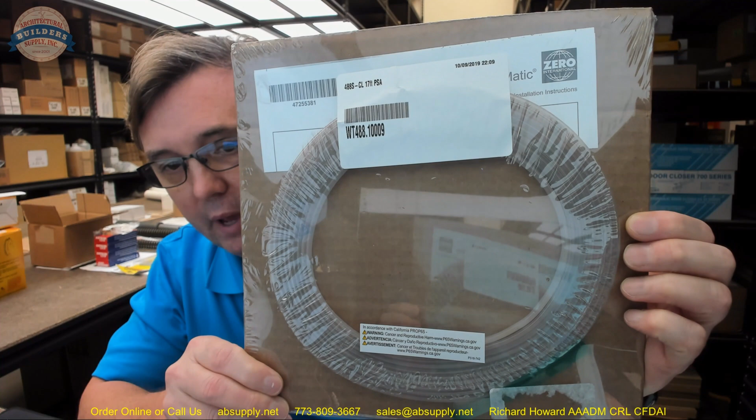Hello, my name is Rich Howard, owner of Architectural Builder Supply, and this video is to bring you a closer look at the Zero number 488S-CL. This material is adhesive gasketing.

I'm just looking to see where the end of it is. I'd like to pull some of it out of the card and take a look at it. Oh yeah, we found it. Sure. Okay. We'll just peek it out a little bit. I don't want to unravel the entire run of the material.

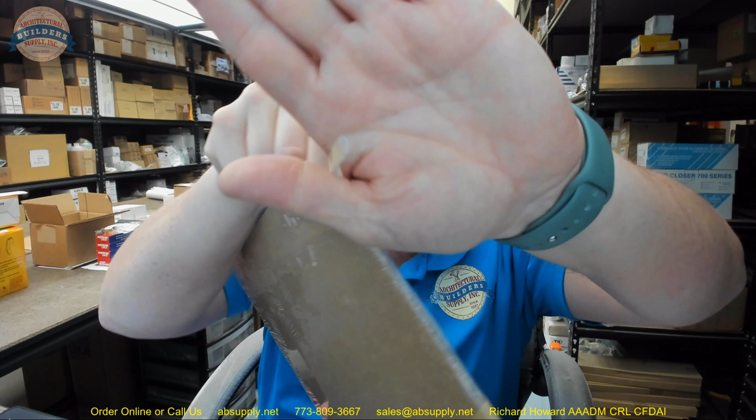This 488 is a very petite version of the typical teardrop style gasketing. The 488 material is really nice to use when you have a, and it's so small we're not going to see much of it, I suppose, on the camera, a very petite area in which you're working. You don't have a lot of room in terms of what it can be compressed down to. You might have a tight gap to begin with, and that's why you might consider the 488.

That's a peel-away paper backer covering the 3M adhesive on the back, and I specifically say 3M because it is absolutely the consensus of the hardware industry where adhesives are concerned. Coincidentally, along with my actual experience using 3M adhesives, it is the highest caliber available, period. No company manufactures an adhesive product that does a better job than 3M.

That's just my experience, and the fact that these high-end manufacturers use 3M, Zero and others, and not everybody does. I would personally not consider buying an adhesive product if it wasn't 3M based. There's 3M, and then there's everyone else. Anyway, moving on. So the 488 is a really small version of this. I guess we're not done talking about how great 3M is. I can do that all day. It's not going to come off.

Okay, I'm going to take a small sample of this. This client has a 3068 door size, and they've sent a 17-foot roll, so I know that we have an adequate quantity for me to nip off 3 inches of it, because I do want to show you the dimensional properties of the 488S. So the S means silicone. Silicone is really great because silicone is superior.

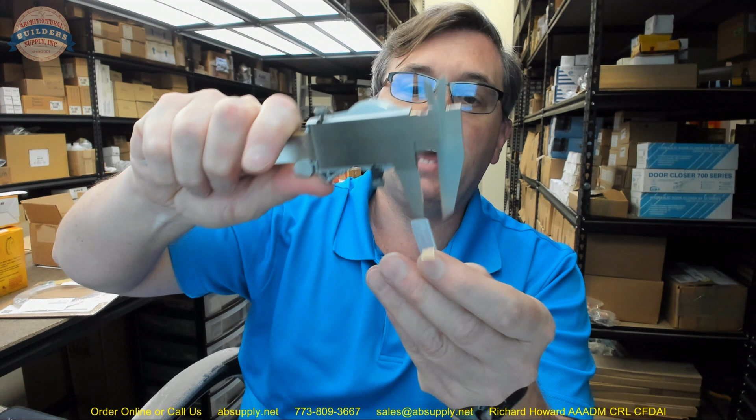0.355. Obviously it's silicone, so I'm not getting completely accurate. 0.375, and then the thickness is 187, which is 3/16. And my caliper tells me, yeah, that would be accurate. 187, sure. So it's 3/16 rather than the standard 1/4 inch.

So this will permit you to compress that down in an environment where, if you have a wood door, let's just skip fire-rated. This wouldn't apply for that. But if you have a wood door and your margin is less than 1/8 of an inch, you're not going to try to stick that traditional 1/4 inch thick material. You'll need to go with something smaller. And that's where this comes into play.

Now, you also might have an application where you don't have a lot of room, and you can't go with a 1/2 inch or bigger. And 3/8 is perfect for your example, and that's what this would be. Real great option for that. Okay, let's switch to the screen view where we can look at the mounting drawing along with the product brochure. Let's do that next.

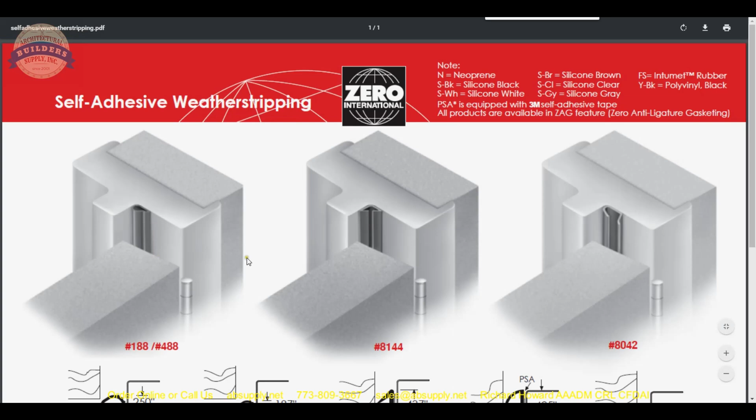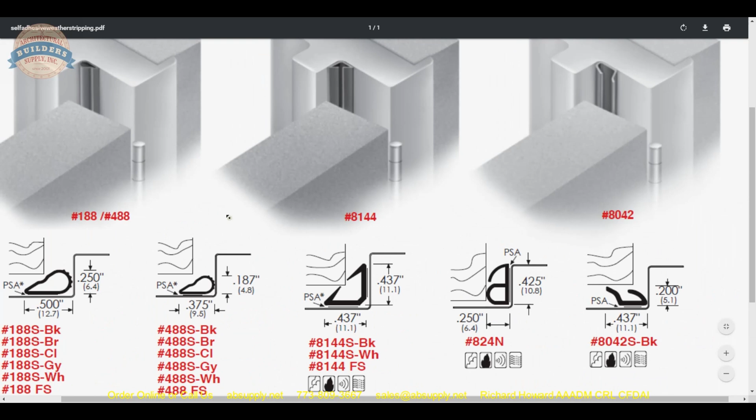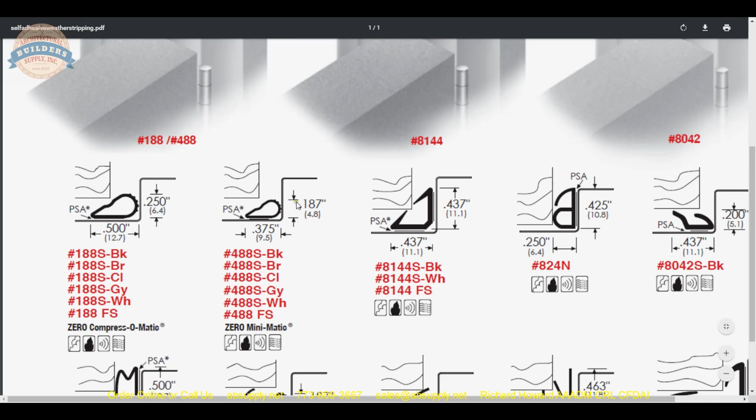One image alone for the 188 and the 488. They install the same way, the difference being the size. The 188 is your common 1/4 by 1/2 versus 3/16 by 3/8. The letters here tell us the color, which are defined up in the upper right-hand corner. Okay, CL is clear silicone.

Other common items that we can see from Zero, I can tell you that they're all reasonably common, but we do sell more of the 8150, the 117, this double bat wing occasionally, not very often. Certainly have sold the 824. I mean, we've sold all of the material, but those were the most common ones. Okay. Obviously, if you're looking for the most petite footprint, that 488 is going to do it for you.

They have an FS, and that's going to be Intumet rubber. Intumet is going to give you the ability to have an intumescent feature on your gasketing if you needed to. If that was required by code, by the listing of your door manufacturer, it will give you that ability. Okay. Smoke rated, fire rated, acoustically tested, air infiltration tested is what all of those mean.

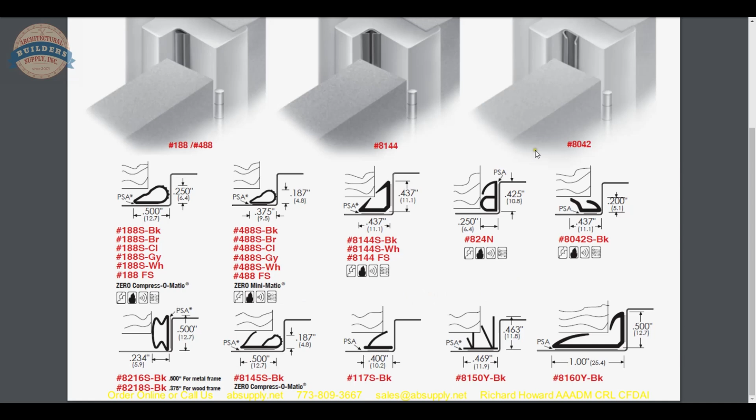Okay. Now to the installation instructions. Let's dive into the world of how to install this material. It's just one page, and let's dive into it now.

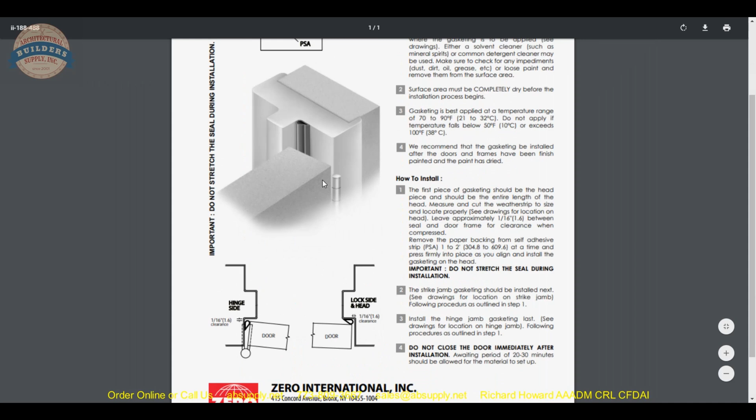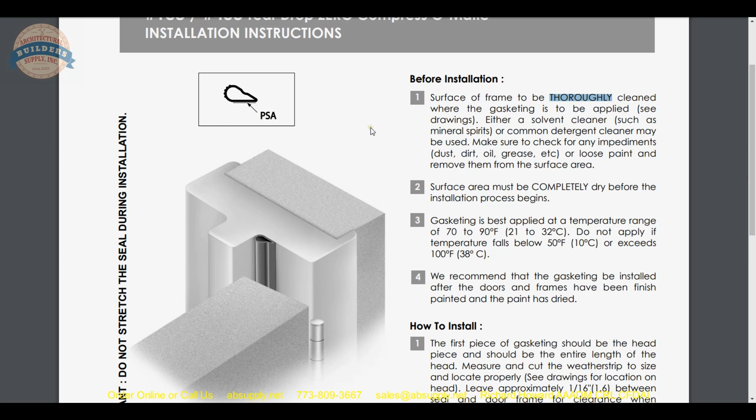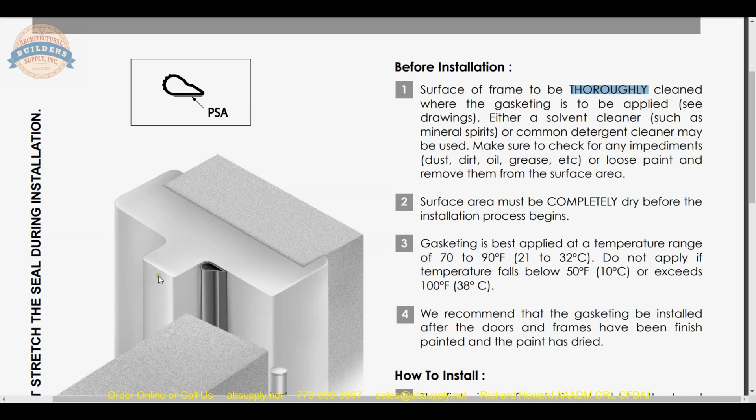Okay. Now here we are at the installation instructions, and the summary, if you take nothing else away from it, the one thing to take away is the frame must be, when they say thoroughly in caps, they really mean thoroughly. It must be utterly clean and free of any dust, debris, any oil, any residual cleaning products. The paint, if it's been recently painted, has to be cured at least a week. It has to be so thoroughly clean that it might initially surprise you as to how important that is.

However, once the material is clean, you can guarantee a very substantial bond of the material that will keep it working and staying in place correctly. The first time I put this material on, I was convinced I had the frame clean. Well, went back an hour after to check, and sure enough I had detachment. And then I realized upon further inspection, no, it could have been cleaned better. And that's where I went wrong. And I only performed that sort of mistake one time.

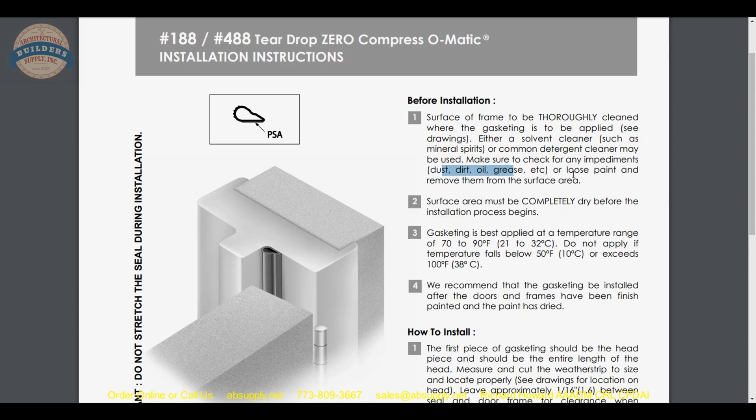Surface of the frame to be thoroughly cleaned where the gasket's to be applied. Solvent or common detergent cleaner may be used. Please make sure to check for any impediments or loose paint and remove them. Leave no trace of any cleaning material. An alcohol wipe would be a good way to start, and actually probably a good way to finish. Completely free of lint, dust, and debris has to occur.

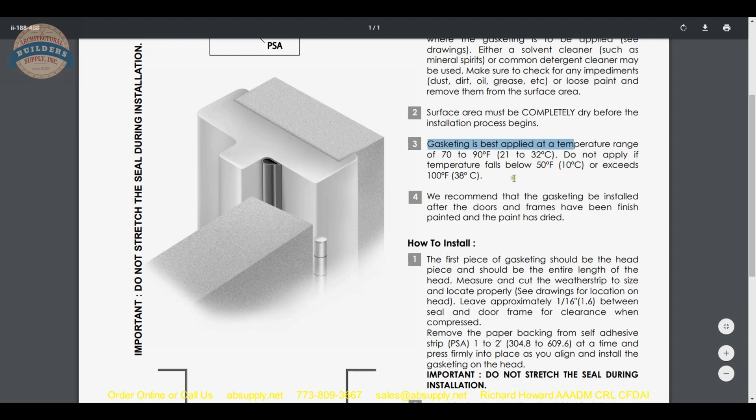Okay, step 2, completely dry, so more about cleaning. Gasketing is best applied at basically room temperature. Don't store the material. Don't order it unless you know you're going to use it within 6 months, let's say. And if you are going to keep it on the shelf, make sure it's in a climate-controlled area.

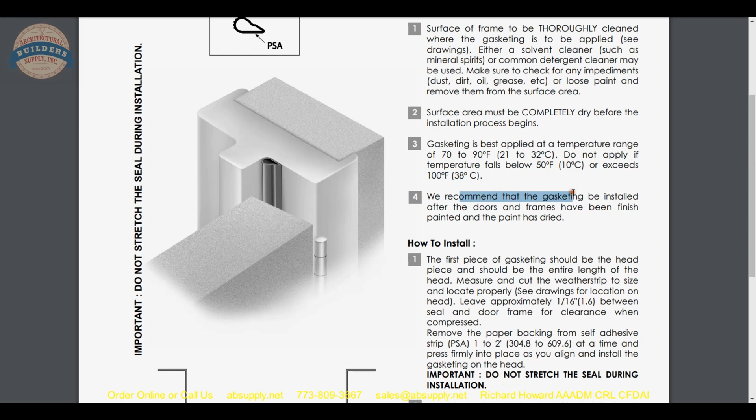They recommend that the material is installed after the doors and frames have been painted and the paint is dried and cured. As for installation, don't stretch the material.

The first piece of gasketing should be the header, running the entire length of the head. Measure and cut the weather stripping to size and locate it properly, applying it on the face of the stop at your lock side and header, then on your hinge rabbet on the hinge side.

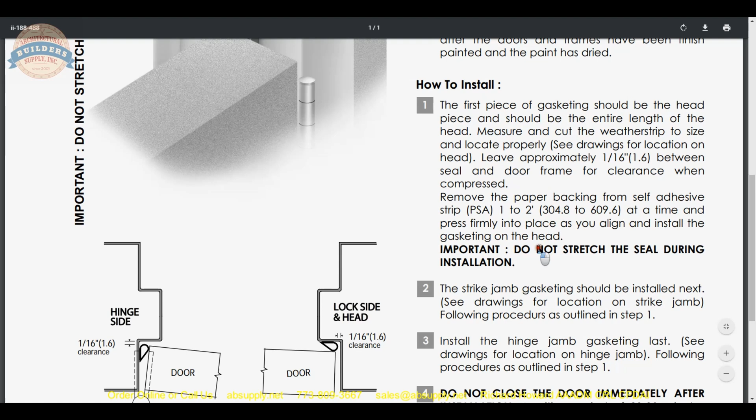So when they say measure, cut, and do not stretch, you've measured it and cut it to length. If your piece is longer when you get to the end, you know you've stretched it, so immediately detach and attempt it again.

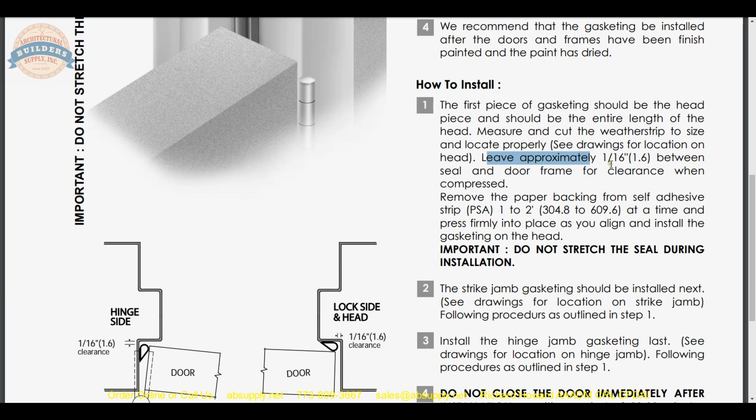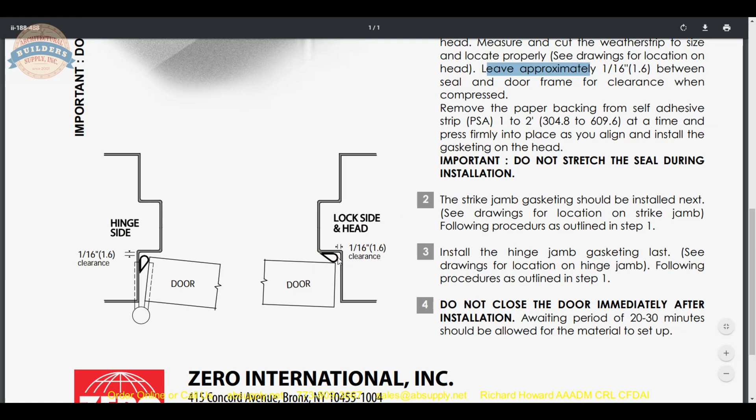Leave approximately a 16th of an inch between the seal and the door frame. That's because it's going to compress in this area and fold down a little bit. If it's 3/8 in its natural state, it'll be a little bit greater than 3/8 when folded down, or at least ever so slightly smaller.

Remove the paper backing from the self-adhesive strip one to two feet at a time and press firmly into place as you align and install the gasketing on the head. I like to work with a shorter length because I have less of a tendency to want to stretch it to make it straight. Patience is really the best way to proceed installing this material straight.

Your frame is full of nothing but straight lines, and I've seen this material installed in a very wavy, haphazard fashion that looked horrible. Patience and time is how you'll end up getting it not only secure but looking good as well.

Then go to the strike jamb next, and then finally the hinge side. Be mindful to observe these installation points. You don't want to install on the lock and header on the rabbet because that will be a point of weakness, where every time the door hits the material, it will want to pull the adhesive away.

Do not close the door immediately after installation. When you get it installed, a tremendous amount of pressure needs to be applied to get a real positive seal. Wait 20 to 30 minutes after the material is initially applied.

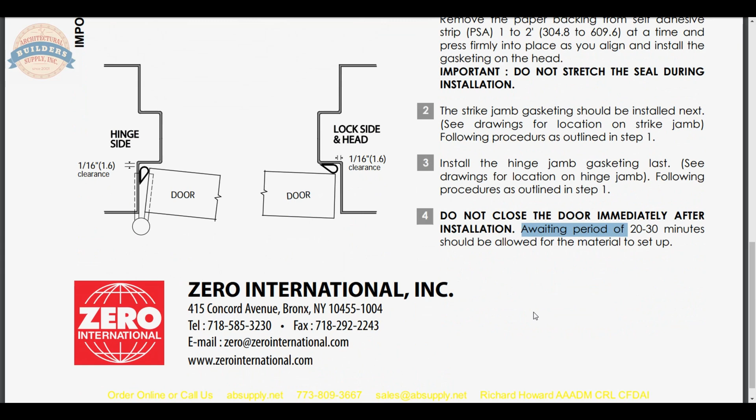For setup, other manufacturers say close the door and leave it closed. Within 2 or 3 hours, you can't remove it and replace it. Put it on solidly the first time, leave it alone, don't touch it, and the next day on the job site you should be in real good luck.

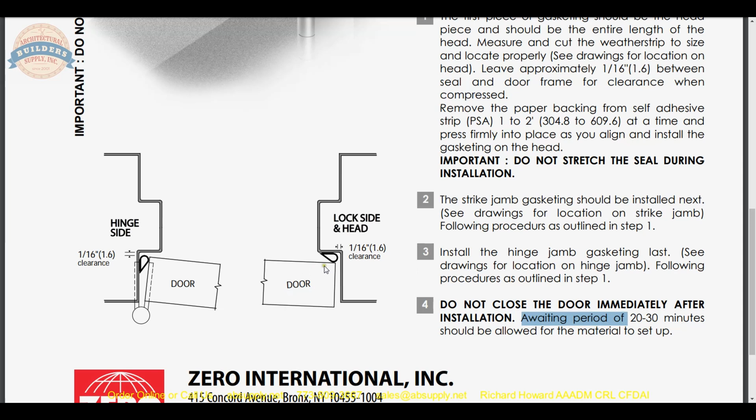Any detaching that you notice, you can immediately rectify, but it has to be done immediately. So that is the installation instruction of this material.

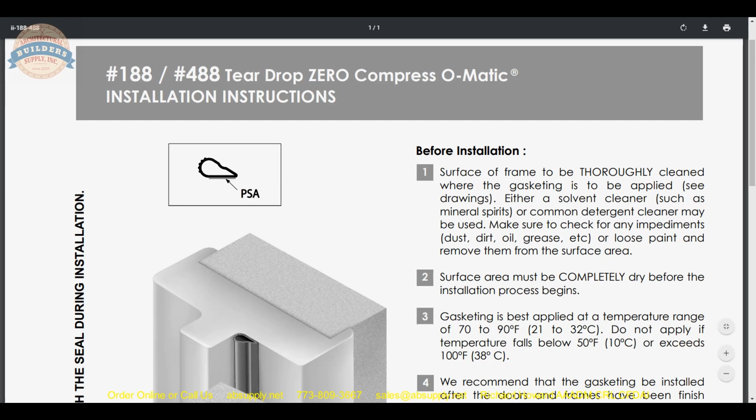Now let's jump back to the camera view and conclude this video.

In conclusion, we've gone over the installation instructions, what it looks like, how to install it, and where you use it: your smoke-rated doors, your fire-rated doors that require this material, and any doors where you're looking for air infiltration or sound attenuation control. But also, it's just an inexpensive and easy to install material.

You could use this anywhere you want to give yourself some sort of buffer between the door and frame. You could also use it in other areas. I've had people use this in crafting scenarios where they were placing material on top of it. Use your imagination, you can use it for a lot of things, is the bottom line.

It's also available in all those different finishes as well.